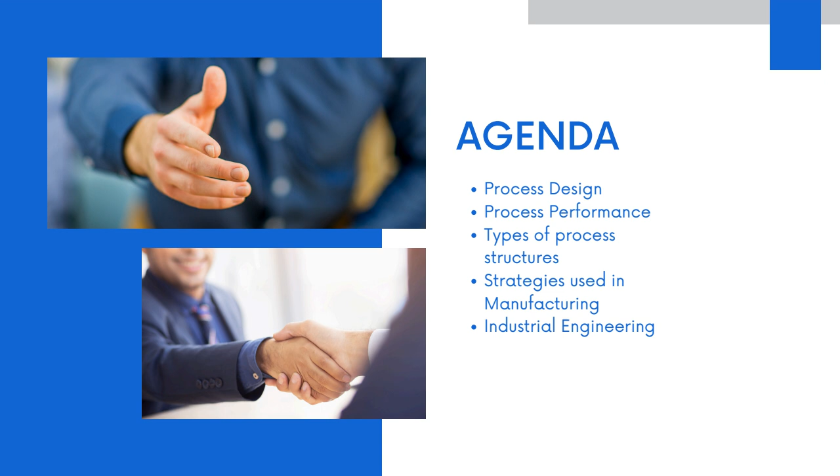and so forth. So just to kick off today's session, from an agenda perspective, we are going to be focusing on process design, as well as process performance, the different types, strategies that are used in manufacturing, as well as within the service sector, and then industrial engineering as a whole. Right, so let's kick off.

So firstly, from a process perspective, we ask ourselves the question of what is a process? And the textbook definition is it's a method that will be utilized on a continuous basis, which will result in either creation of a good or a service that can be delivered to a customer at a profit. If you really think about process and process design, it basically is a series of actions as well as steps that's taken in our everyday life that helps us to achieve a specific goal or a specific outcome.

We follow a process on a daily basis. So for instance, a process like when we wake up in the morning, do we dress our bed first? Do we go into our bathroom? Do we brush our teeth? Do we have a shower? Then have a cup of coffee, then have breakfast before we actually leave the house in the morning. So all of that is a process. A lot of times we stick to the process because we follow a certain norm in order for us to then achieve that goal or that strategy or objective at the end of the day.

So during the design phase of the process, there are two aims. The first one is we need to get the most amount of value that the good or the service will be able to create. And then the cost that's added to the good or the service during the creation must be minimized. So keep cost as low as possible and the actual process to give you as much value as possible. So to share another example, like a process of doing your laundry.

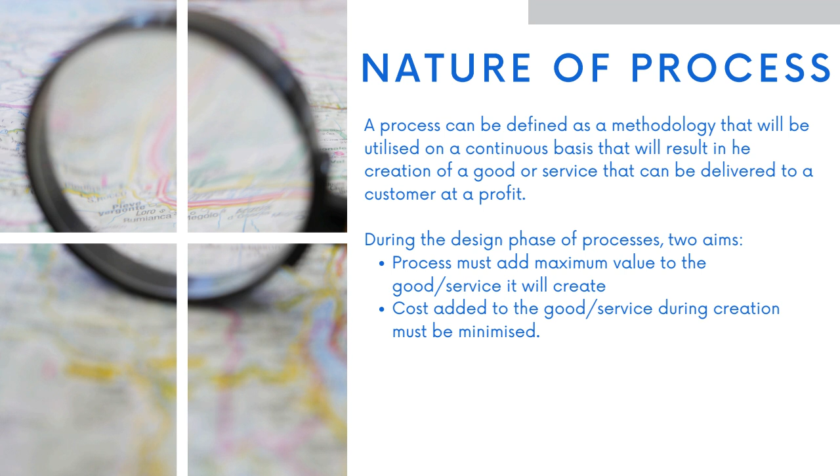Then we go on to characteristics of a process. So what features are part of the process? So the nature of a process basically refers to its characteristics and how it functions within a specific organization to achieve specific goals. So one of the characteristics is sequential flow. So a process follows a sequence of different steps, and every step sort of builds on a previous step.

So you want to form a very logical progression or marginal improvement towards achieving what your outcome is. So the sequence basically ensures that your inputs are then transformed into outputs. So I hope you're seeing the correlation in various learning units as we're going along, how one then contributes to another.

Then we have repeatability. So a lot of the processes are typically repeated, meaning that they are performed in the same or a similar sort of manner every single time to produce consistent results. So you want marginal improvement, you want consistency in your process flow, therefore you have repeatability with it. The consistency helps from an efficiency perspective and quality control, especially if you're in a manufacturing environment.

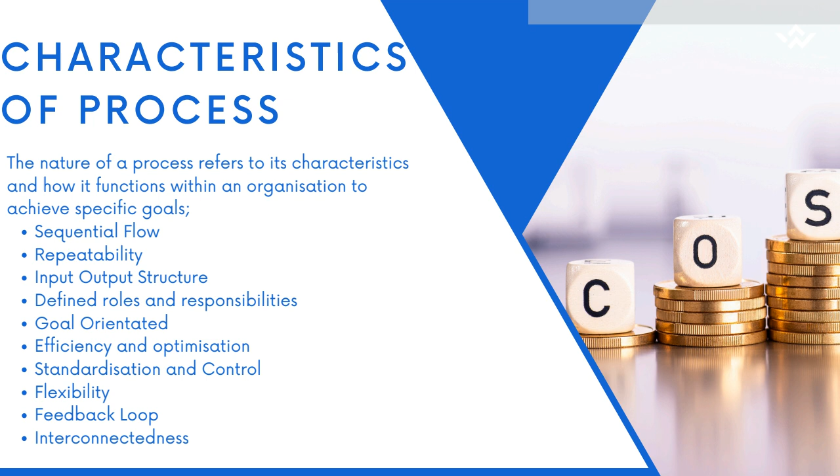Okay, then we go on to the different methods to measure performance itself. From a measurement perspective, analyzing the performance of a specific process is very important so that you know the process is efficient, it's effective, there's good quality there, and you can change it when you need to so that your business operation is successful at the end of the day. So how do we measure the process itself?

The first one, and I speak about it a lot because it's very important, is how we measure individuals and stakeholders at any point in any business: KPIs, key performance indicators. KPIs are specific, can be quantified, and are used to evaluate the success of a process in meeting the objectives that were set for that particular process. A lot of times the KPIs that are set are aligned with the business goals and objectives, and you're able to measure them from an efficiency as well as a cost perspective.

So from a KPI side, there's a lot of things that you need to take into account. Some of it being you have a targeted measurement, meaning that you're focusing on specific areas that are important to the business or to that specific process. It's very data driven, which means it can be tracked over time with the relevant data that you put in. And it aligns obviously with your objectives.

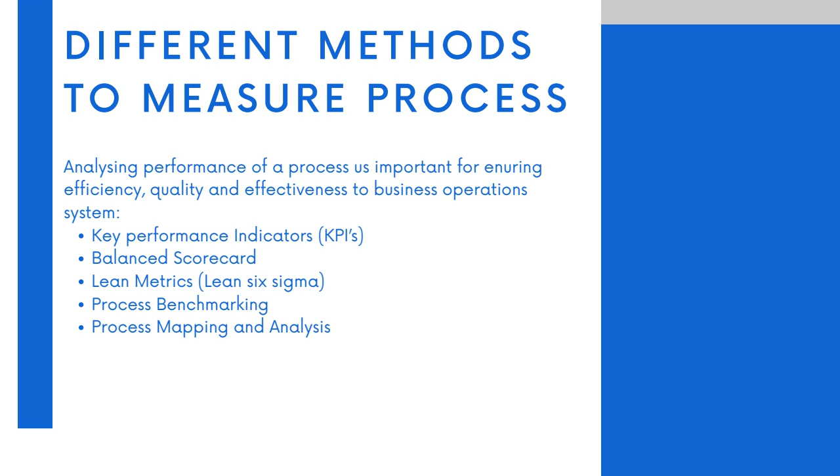The next one is the different types of process structures that fall within a manufacturing setting. And I think when we're looking at it from a manufacturing perspective, we need to understand the different processes that follow in. It's more of a product-focused environment where they're focusing on routing every single piece of work through the operation process. And it's very different to where the service industry sits.

The first one is job process, which is a process-focused process, and it's very adaptable. The scale of operations in this type of process is pretty small, and it's very structured around particular events. The result is that the process produces a diversity of products in very small quantities, or very customized products. And obviously the quantities are pretty small when it is customized.

The equipment used within the process is of a more general nature, and very little specialized machinery and labor are used for it. For instance, if a customer orders a particular type of lounge suite, let's say from Joshua Doore, it will be completed before the order for lounge suites for another business commences. So it's understanding what that job process is and focusing on that specific process.

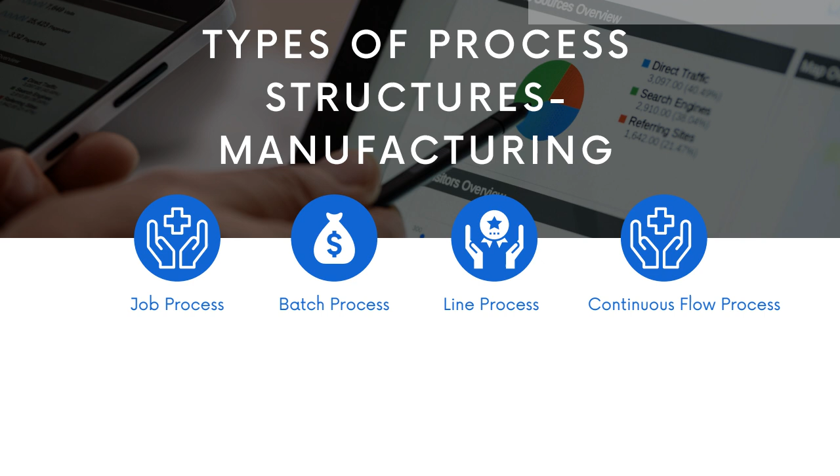The next one speaks on the strategies for manufacturing process. So you'll come across this a lot, especially from a supply chain perspective. And it's very nice to understand the 3 concepts or the 3 strategies that are mentioned here from a manufacturing side, because this will help you in the beginning to understand where your customer or even your business is sitting at from a supply chain perspective.

So a lot of times you can then identify your lead time, your delivery time, your expected ETA on a specific product if you understand what strategies the business actually uses. So the first one is make to order, which means it's a manufacture to order strategy. And it's normally used where you have low volume customer specific products that need to be produced. So it's very much a job or batch-based production process, and it's not something that's continuous.

You have a very high level of customization for this specific product, and it has a high degree of flexibility as well. So anything that a customer would change in a specific item within that supply chain, it can be flexible and it can be moved to what the customer requires.

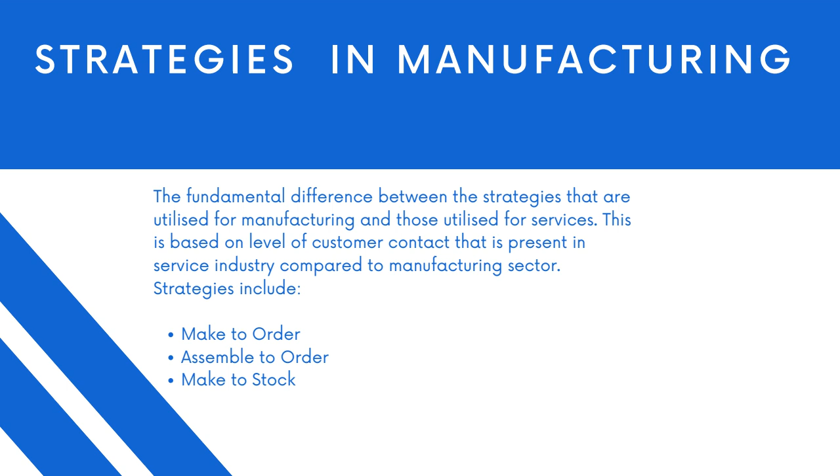So the next one is types of process structures from a service side. So first, you obviously want to be able to design the correct process for the service industry. And it's no less important than the manufacturing side. The same care that we take from a manufacturing side needs to be taken from a service perspective. And there are three different types, the first being the professional service process. And it's typically giving a wide variety of services with low volumes.

The customers are basically involved in this type of process over a period of time to plan or design. The process is very highly customized, so not standardized at all. Every stakeholder is part of it. The employees in the process have a lot of freedom of choice in the way the customer is handled in the system, and the process can be classified as being focused on people rather than equipment.

Like, for instance, a doctor's surgery, a law firm, an attorney's office, dentist surgery. So anything from a professional service perspective, even if it's a hospital, for instance, all of this will fall part of this process. Second one is our service shop process, which falls somewhere between professional service and mass service, so sort of the in-between. It's got a degree of customer participation in the process, as with your professional process, and also a high degree of adaptation, meaning that the process has a high volume of customers, and there's a fair amount of interaction with these customers that is present.

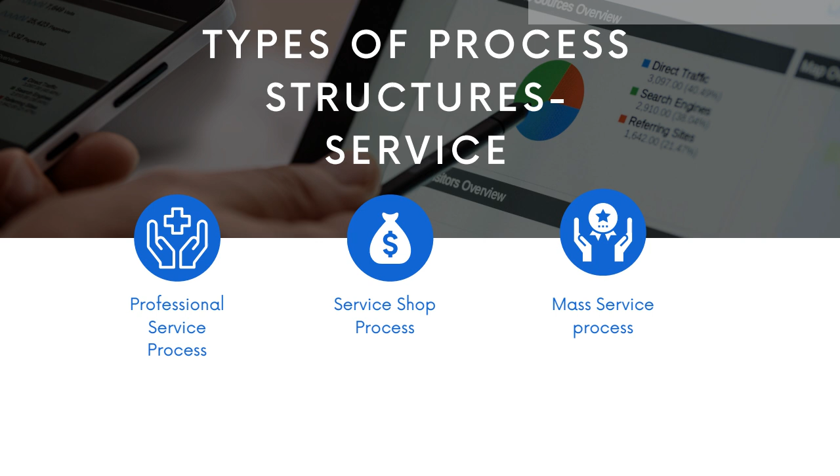Mass service is basically a process where you have a large number of client dealings. There's very little scope for having a customized service. The front office staff have very little leeway in which they deal with customers, and they have very clearly defined roles and responsibilities within the process that they need to follow, and they're not allowed to deviate from their standard processes. So, for instance, if you walk into a retailer like a Pick n Pay, Checkers, Spar, it's your front office staff, your till operators, the people that pack your groceries away, the cleaners, etc. So that's where the different processes fall into place from a service industry side.

Okay, and then we have industrial engineering. So it's more the difference between where process engineering sits and where industrial engineering sits. The thing with both process and industrial engineering is they're both focused on efficiency within the business. And I think everything that we spoke about today focuses on efficiency: how do we get the most productivity, either from a staff perspective or from a manufacturing process perspective, and quality within our operations. So process engineering is basically focusing on designing, optimizing, and controlling specific processes, especially those involved within the production or transformation process. It deals with the flow and transformation of material and energy.

Whereas industrial engineering is broader and involves optimizing entire systems and processes within an organization to improve overall productivity, quality, and efficiency, looking mainly at supply chains, ergonomics, human factors, those sort of things. Industrial engineering involves various aspects within the business, like logistics, labor, management, technology. How do we integrate all of this within the workforce and with stakeholders? So that speaks on both those processes to give you more of an understanding of industrial engineering. From an industrial engineering perspective, it's always nice to look at it from an ergonomic side, whereas process engineering is more specifically dealing with different processes. Industrial is more from an overall business process perspective.